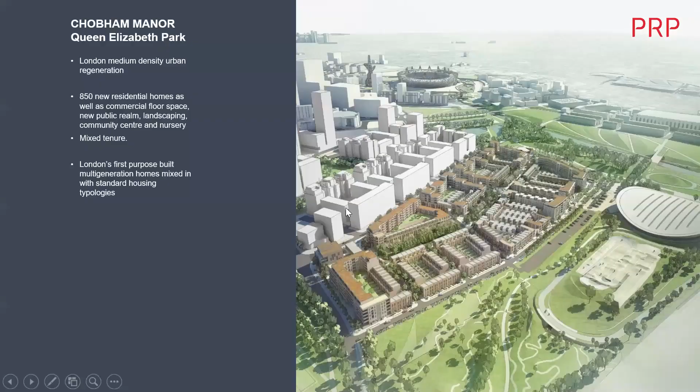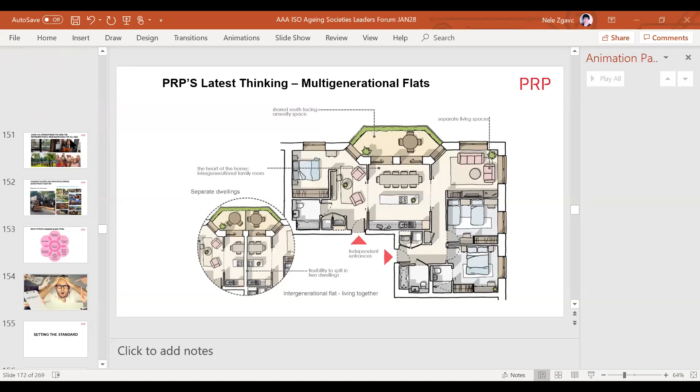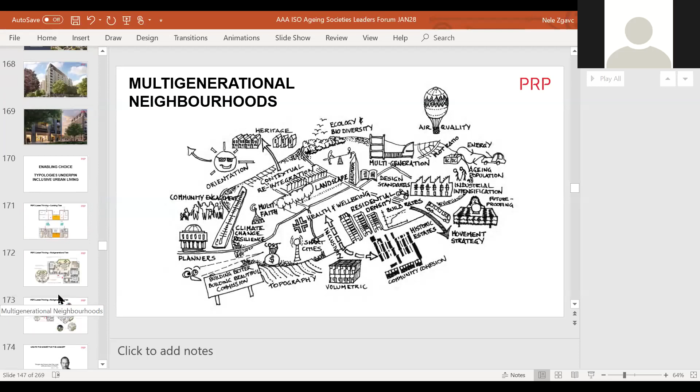I don't seem to see Manisha, so maybe Caroline should jump in and I'll track down Manisha. No problem. Are you okay with that, Caroline? Yes, I'm in. Oh, wonderful. Let's just see if we can get your slides queued up. There we go. Right, I think I'll turn my screen off just to avoid any possible technical hitches, if that's okay.

So yes, I'm Caroline Dove. I'm a partner of HTA Design. We are actually a multidisciplinary practice designing multi-generational neighbourhoods. So we've asked ourselves the question, what are the ingredients of an integrated, interactive, inclusive and sustainable community, and how can we best translate these into a new standard for smart, multi-generational neighbourhoods?

Multi-generational neighbourhoods designed with communities is the theme of this brief presentation, because if you're going to make places where people can enjoy independent lives in a supported community, a good place to start is to find out from those people what they need and what they aspire to. Working with Clarion and their residents, we're taking a holistic approach to defining what good looks like, setting out some key ingredients for the neighbourhoods for the future.

So I'm going to talk about two of these projects, one of which is a good example of how existing places can be transformed to become age-friendly, and one which is a practical way to create a new multi-generational place integrated with existing homes. Sarah asked this earlier, don't multi-generational communities already exist? And yes, they do, but their homes and places often need some rethinking. Many people feel they have no choices as they get older and their needs change, so can't move. But they may also feel isolated and lonely, not in the right home, in the right place. I think the SMART plan is to design achievable and deliverable schemes with choices of the right homes in the right place for the existing communities who will live there.

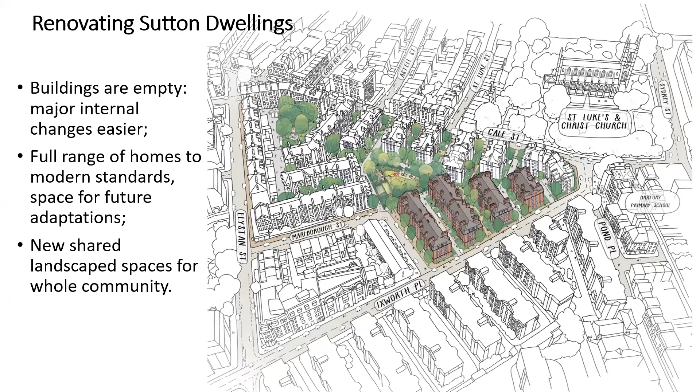We've added lifts, so all floors will now be fully accessible. And there's going to be lots of insulation internally and much higher thermal performance, improved air tightness, ventilation, and other sustainable enhancements for a low carbon future.

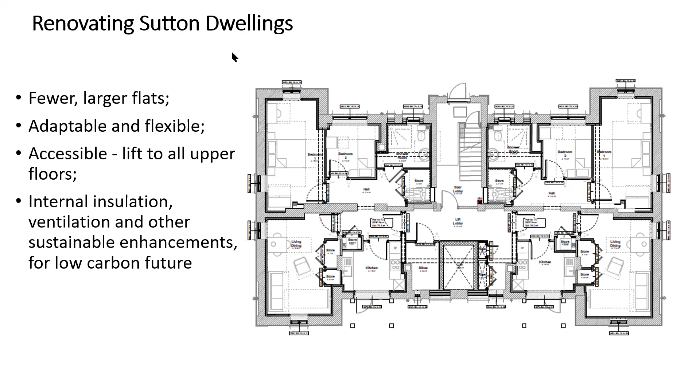The buildings are restored, the elevation is cleared of clutter with new windows which will be easy to open, and most importantly, private balconies are added. And I like Rinat's point about eye contact with your neighbours, and I think this will encourage a lot of contact with people as they pass by.

And there are also green biodiverse spaces that we've added between each block, so there will be places to sit, meet neighbours, informal mingling, as actually Rebecca's just said. Everyone's pleased with the proposals to relocate waste and recycling bins and cycle storage, so they're much more accessible, and this frees up more space for the landscape.

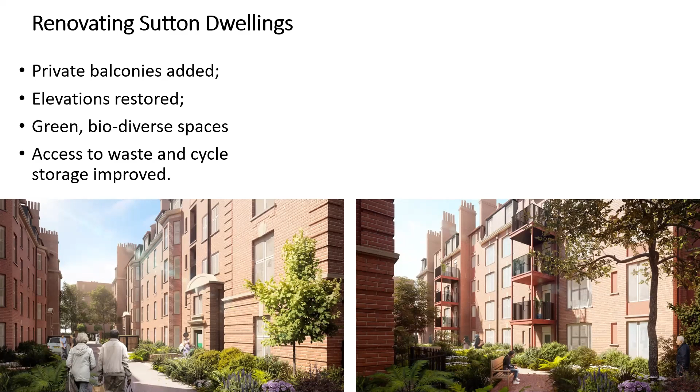So here are some views of that new shared garden right at the heart of the estate, to be enjoyed and looked after by all generations. There's an existing community of older people as well as families, single people in wheelchairs. The transformations here will make Sutton dwellings much more age-friendly and will sustain agile ageing.

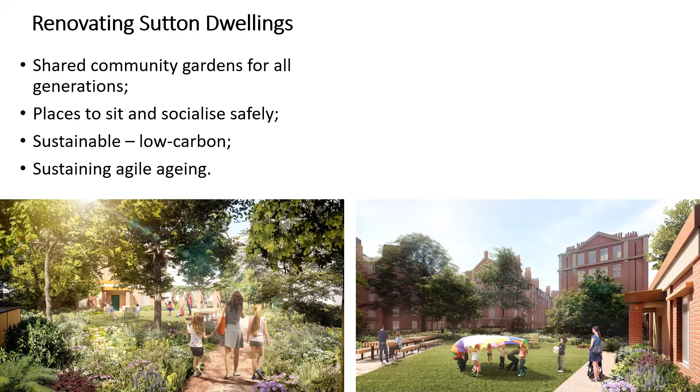Now we moved south. We're still in London. We're in the southwest London suburb of Merton, and this estate is right beside the River Wandle.

Ravensbury has all the right ingredients for an active, sustainable and successful place to live. It's surrounded by parks and the Riverside Trail. It's close to shops, GP, transport. And there's an established community, some who've lived there since the 1950s when the houses were built.

So why regenerate Ravensbury at all? The houses look well laid out. They've got huge gardens, there's lots of trees. Some of the brick-built homes are in good condition and will be retained, but the concrete houses are defective and unmortgageable, and they don't meet modern standards. Older people are finding the large gardens difficult to manage, and small flats with steep stairs are not suitable either.

Some even have their children and grandchildren come back to live with them, making quite crowded multi-generational homes. There are other issues too. It's in a flood risk zone, there are large mature trees, and it adjoins a conservation area. There's quite a few constraints to overcome.

And in looking at Ravensbury, we've engaged the community in a very detailed design process, listening to a lot of different opinions and designing their homes to give them the space and amenity they've asked for.

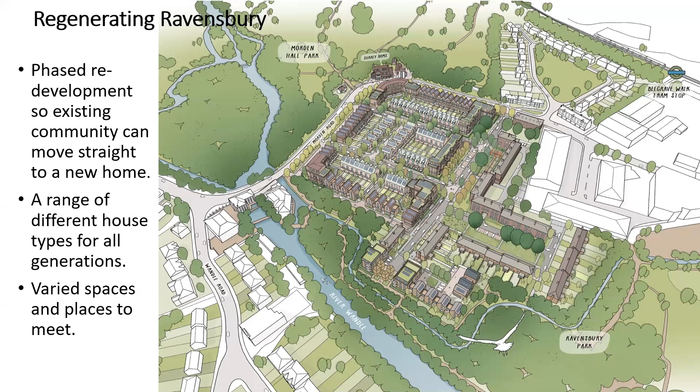So this illustrates, just at a glance, it might not look very different in the layout, but we've introduced more streets and more spaces and more community gardens, which will give a variety of places to meet. These much better connect to the parks and Riverside Trail, so there's no excuse not to have plenty of fresh air and well-distanced exercise.

So the layout we've designed here offers a wide range of typologies. We've got everything from 1-bed flats for older people in that dark blue corner block, through to much larger family houses - you can see the red ones by the Riverside houses - and then in between a range of houses and flats for everyone.

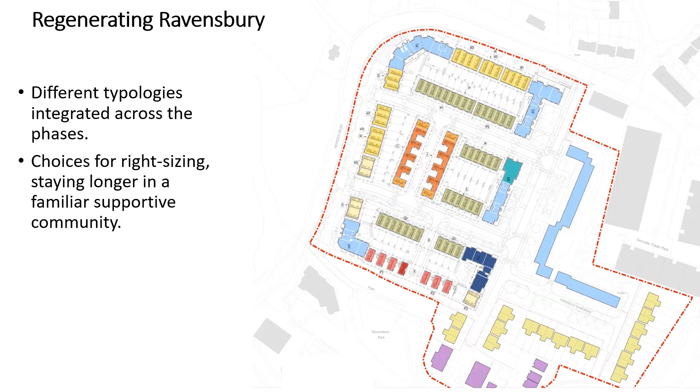So over time, people can right size and they can stay in this familiar neighbourhood for much longer.

So we've made all the homes as flexible and adaptable as possible, so they have more space for future needs. Just as at Sutton Dwellings, they've got space for potentially home working, homeschooling, hobbies, and then coming into the future, potentially more adaptations.

The whole scheme's been designed to be zero carbon, so it should be affordable to heat. And it's been designed to be sociable, with places to meet neighbours in the streets and spaces. There's a community room too - there's one at the moment, but it will be renewed and slightly larger, to encourage the community to come together, both existing residents and new residents who will be joining this community.

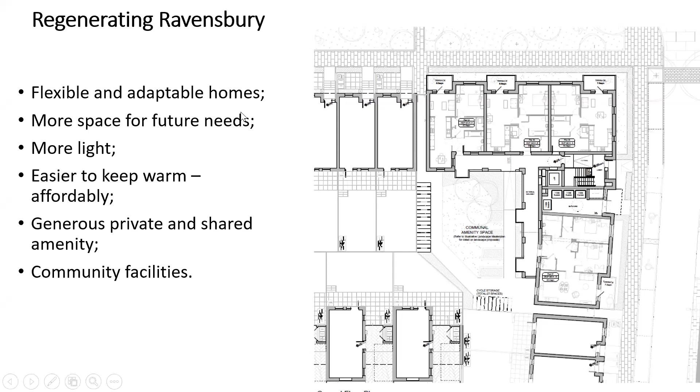So finally, I've illustrated here some of the key ingredients for a gold standard for agile ageing, which we've been thinking about. Both schemes actually illustrate these points, but this is obviously the Ravensbury scheme. They show that we can sustain independent, healthy living, promote an active, sociable, supportive community, accommodate change and offer attractive choices. They're integrated, with no segregation of old people. The design is age-friendly and inclusive, and they're sustainable, meeting the climate change challenge, and long-lasting, bringing more benefits to the community as a whole.

So these 2 schemes are about to be built, so we'll find out soon if we have succeeded. Thank you.

Thank you very much indeed for that, Caroline. 2 schemes I know very well, and these are 2 that I'm responsible for, and both have cost me what little hair I have left to get to this stage.

I think what's particularly interesting about them is, although they've both now secured planning, it's going to take a number of years to complete them. I think we at HTA and ourselves are very keen to use both these examples to learn from, to see how hard we can push the boundaries a little bit, particularly in terms of intergenerational living and sustainability more generally. So it's going to be very interesting over the next couple of years to see how these develop and how much of the learning we've already picked up from these two schemes we can start to apply across our regeneration program as a whole. But I'm sure we'll come back to this in the questions.